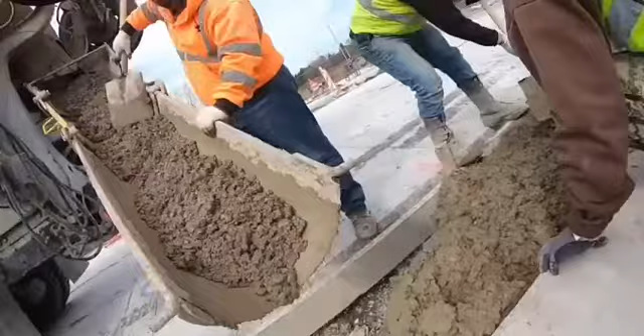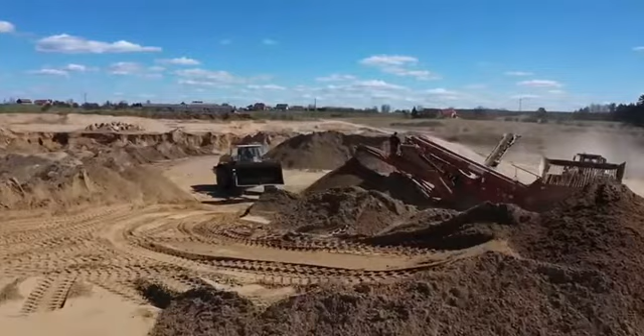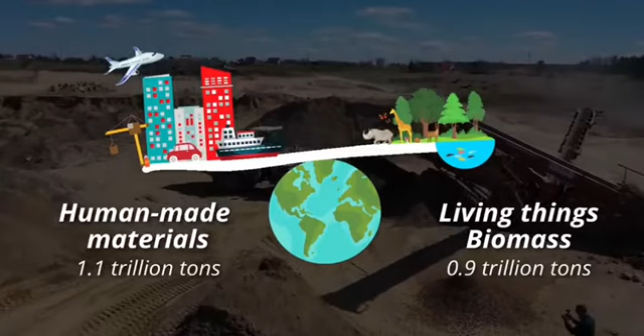Concrete is one of the most widely used substances on Earth. It has allowed us to tame nature and is the foundation of modern development. However, it is causing our blue and green world to become grayer by the second. In 2020, scientists estimated that human-made materials reached 1.1 trillion tons, exceeding the mass of all living things on the planet, including people, bacteria, plants, and animals combined.

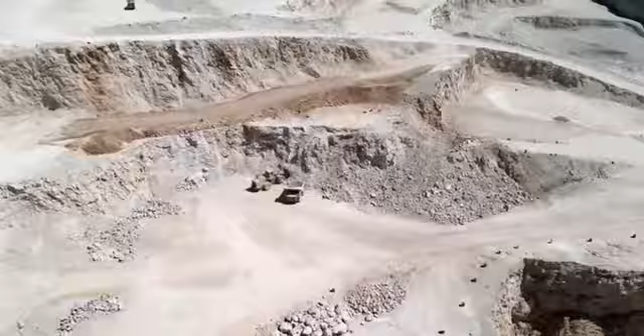One of these human-made culprits is Portland cement, the key ingredient in concrete that binds all the other ingredients together. Its production is very energy-intensive, it emits carbon dioxide and other greenhouse gases, it causes soil erosion and noise pollution, and it adversely affects air quality. Researchers around the world are trying to find an alternative to traditional cement and concrete that is less destructive to our planet. One very promising material is geopolymer cement.

It completely replaces Portland cement with waste industrial products. It can also be much stronger and perform better than traditional cement.

The issues related to conventional concrete or Portland cement concrete is CO2 and greenhouse emissions. The production of Portland cement leads to release significant amount of CO2 and other greenhouse gases into the atmosphere.

Next is waste product. Waste products are difficult to dispose and affect the environment if left untreated. It would be good if it can be used in making concrete.

The last one is noise pollution. Portland cement manufacture will lead to noise pollution. They also have other issues or problems such as air quality, soil erosion, and many more.

What is geopolymer concrete? Geopolymer concrete is a type of concrete that is made by reacting aluminate and silicate-bearing materials with a caustic activator.

Geopolymer concrete are prospective concrete which possess remarkable physicochemical and mechanical properties. It also known to exhibit excellent performance with respect to fire resistant, acid resistant, and show the good result in testing material.

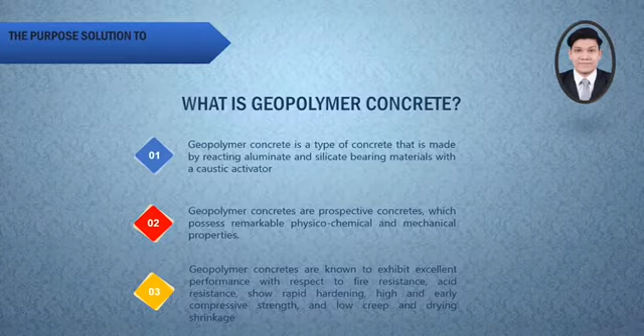As you can see, there are three basic forms of geopolymers, and their structure shows the reaction mechanism of geopolymer and cement-based concretes.

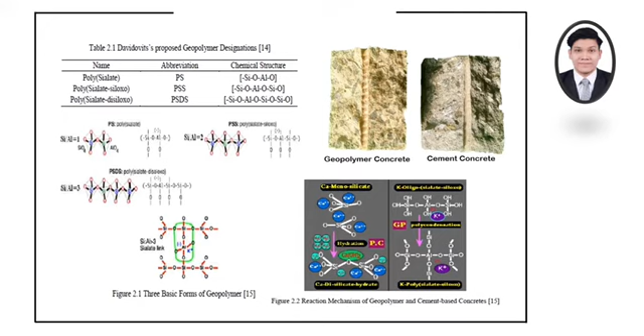What is the advantage of geopolymer concrete? Geopolymer significantly lower carbon dioxide emission than OPC concrete, which is up to 90%.

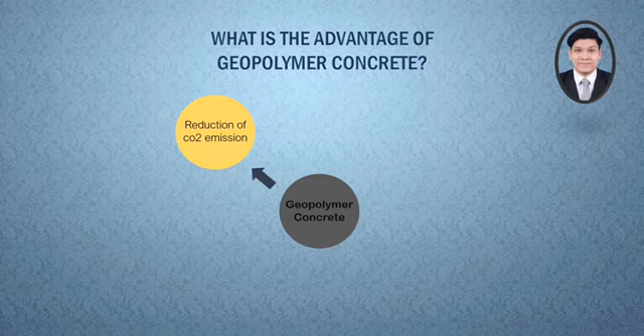Geopolymer concrete give better thermal insulation properties that can reduce the global warming. Next, it providing a viable use for waste material which are often disposed in landfill.

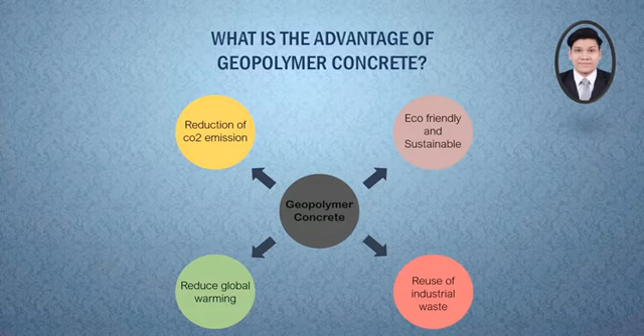And geopolymer concrete also give benefit to environment which are the good strength of durability properties that lead as sustainable concrete.

Constituent of geopolymer concrete. Geopolymeric material can be produced from raw material or industrial byproduct that have rich aluminosilicate composition. The source of material used for geopolymerization can be single material or a combination of various types of material.

Among the potential aluminosilicate-based materials such as coal fly ash, silica fume, and kaolin are the most widely used.

Mechanical properties such as compressive strength, tensile and flexure strength, and modulus of elasticity are the key parameter of evaluating the performance of concrete and to predict the service life. The mechanical properties of geopolymer concrete have been reported to be equal to or better than those exhibited by equivalent Portland cement concrete.

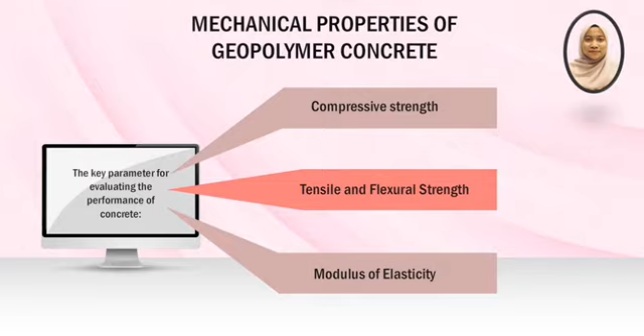Among all the concrete properties, compressive strength is one of the most important properties of hardened concrete. According to van Jaarsveld, it was also revealed that the calcium content in fly ash played a significant role in strength development and final compressive strength, as higher calcium content resulted in faster strength development and higher compressive strength.

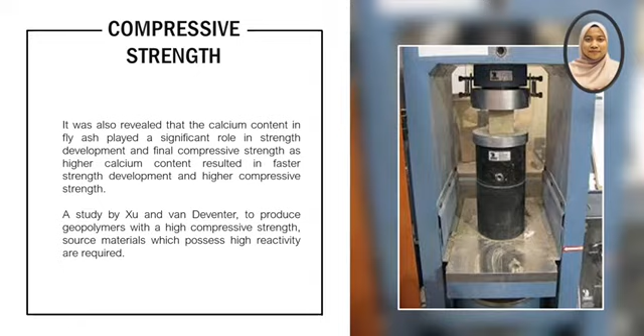Although concrete mixes are proportioned on the basis of achieving the desired compressive strength at the specified age, determination of tensile and flexural strength is helpful in mitigating the cracking problem, improving shear strength prediction, and minimizing the failure of the concrete in tension.

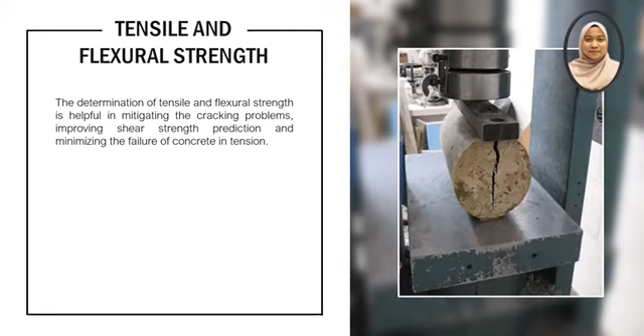Geopolymer concrete is reported to have comparable or higher tensile and flexural strength values than equivalent Portland cement concrete. As in the case of compressive strength, geopolymer concrete develops very high tensile and flexural strength at early age with gradual increase over time. Hardjito and Rangan measured the tensile strength of heat-cured fly ash-based geopolymer concrete by performing the cylinder splitting test on 150 by 300 mm concrete cylinders.

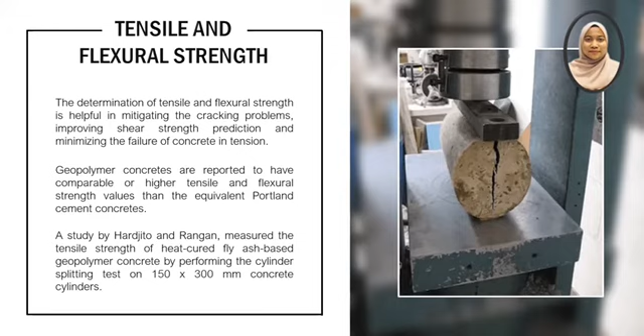The test indicates that the splitting tensile strength of fly ash-based concrete is a fraction of the compressive strength, as in the case of Portland cement concrete.

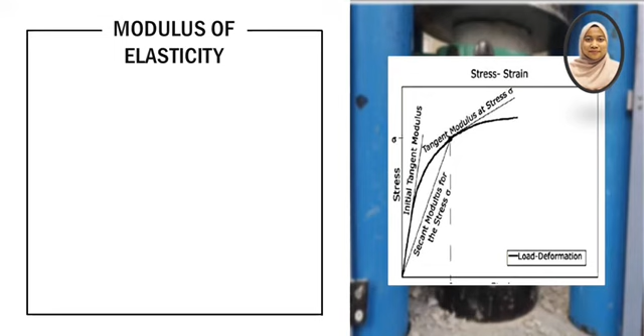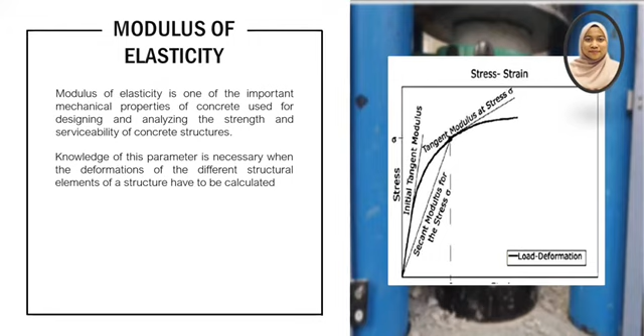Modulus of elasticity is one of the important mechanical properties of concrete used for designing and analyzing the strength and serviceability of concrete structures. In particular, knowledge of this factor is necessary when the deformation of the different structural elements of a structure has to be calculated. Several researchers have studied the elastic characteristics of geopolymer concrete.

Most research studies have reported that the elastic modulus of geopolymer concrete is lower than OPC concrete. According to research by Fernandez Jimenez, the addition of soluble silicate in the alkaline solution improved the modulus of elasticity in fly ash-based geopolymer concrete. However, this improvement was not significant, and alkaline-activated fly ash-based concrete shows a much lower static modulus of elasticity than expected.

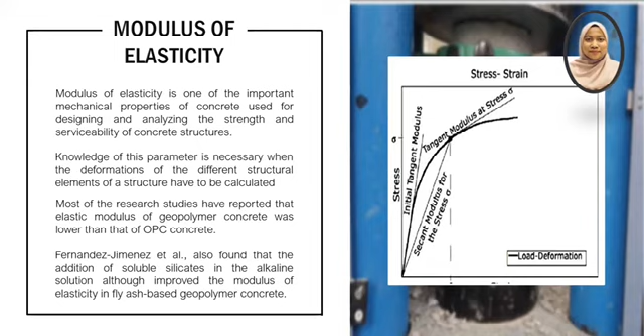Discussion. Figure 1 shows that as the activator slowly permeates through the newly formed coating, the reaction continues at a slower rate, and the compressive strength continues to gradually rise but does not vary greatly with the age of concrete. This contrasts with the strength development behavior of OPC-based concrete, where the hydration process extends over a length of time and gains strength with age.

Figure 2 shows that Hardjito et al. reported that with the increase of activator content, and consequently increasing the activator-to-fly ash ratio up to 0.4, the compressive strength of the resulting geopolymer mortar was increased. However, increasing the activator-to-fly ash ratio to 0.45 resulted in a decrease in the compressive strength of geopolymer mortar. This was possibly due to excess OH concentration, which consequently decreased the strength of geopolymer mortar.

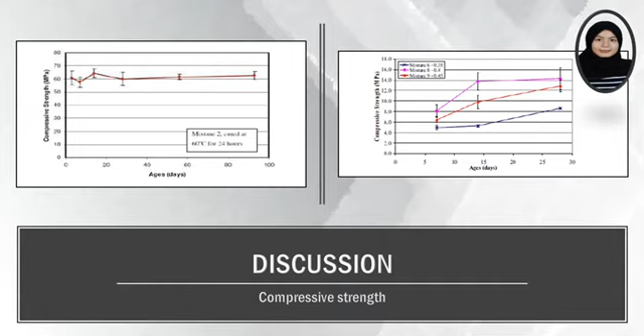Olivia and Nikraz reported that both splitting tensile and flexural strength of geopolymer concrete increased with increasing concrete age. The splitting tensile strength values of fly ash-based geopolymer concrete were comparable or higher than those of OPC-based control concrete. The tensile strength of optimal mix T10 was 8 to 12% higher than that of OPC concrete at 28 and 91 days. This could be due to the effective bonding between the geopolymer matrix and aggregate.

The flexural strength of the geopolymer concrete was found to be 1 to 1.5 times higher than that of the OPC concrete at 28 and 91 days.

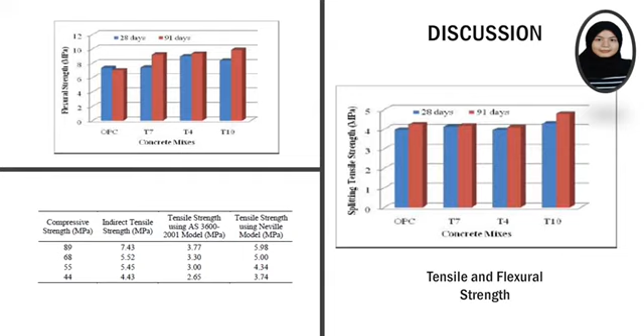Lastly, Hardjito and Rangan reported that the modulus of elasticity and Poisson ratio of fly ash-based geopolymer concrete were of the same characteristic possessed by OPC concrete. Also, the measured stress-strain relationship of geopolymer concrete fit well with equations designed for Portland cement concrete. The measured values of the modulus of elasticity of geopolymer concrete with compressive strength in the range of 44 to 89 MPa were similar to those of OPC concrete, yet the measured values were at the lower end of the values calculated using the current design standard as shown in the table.

This could be due to the type of coarse aggregate used in the manufacture of the geopolymer concrete. However, the Poisson ratio of fly ash-based geopolymer concrete with compressive strength in the range of 44 to 89 MPa fell between 0.12 and 0.16, which were quite similar to those of OPC-based concrete.

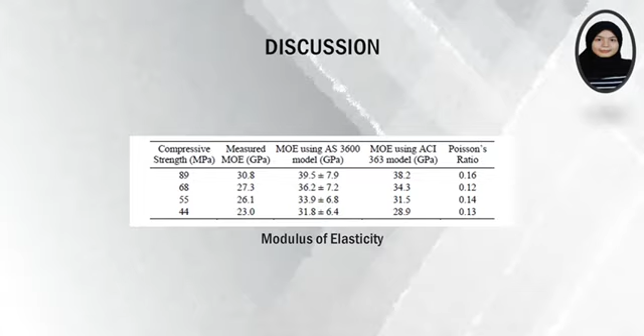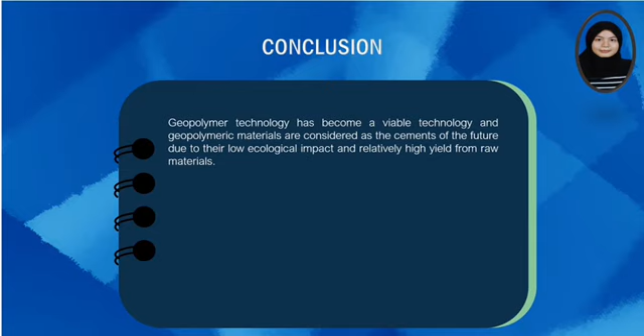In conclusion, geopolymer technology has become a viable technology, and geopolymeric materials are considered the cement of the future due to their low ecological impact and relatively high yield from raw materials. Second, a number of studies have been done on the performance of geopolymer concrete, which shows several advantages over conventional concrete. Third, geopolymer concrete can improve the properties of the structure itself and develop sustainability of the structure.

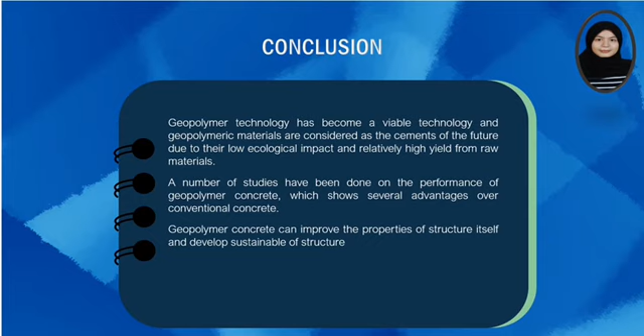And last but not least, geopolymer concrete gets stronger parallel to the increment of the fly ash percentage.